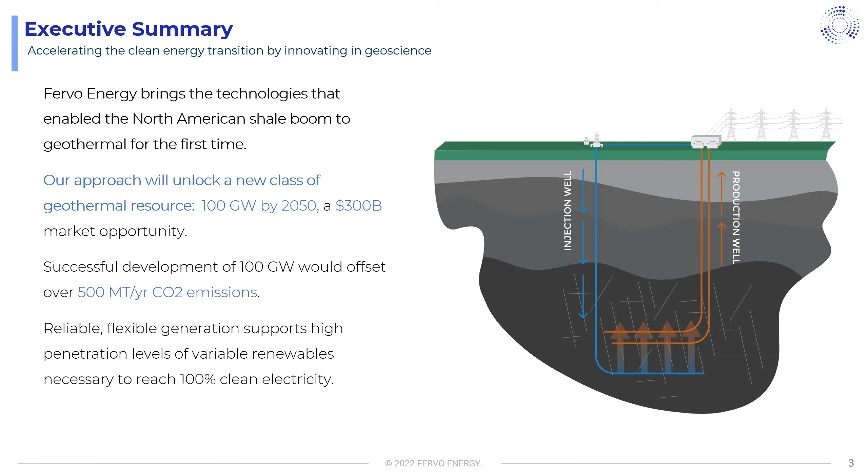There's also a huge opportunity for geothermal to play a major role in supporting the broader energy transition and fighting climate change, in the sense that it provides 24/7 reliable energy. So it works very well with other renewables. In fact, the more geothermal we can bring onto the grid, the faster we can also ramp up solar and wind and other variable renewable energy sources without some of the challenges that come along with that in terms of reliability.

So we're taking an approach to geothermal reservoir engineering and reservoir management that relies on horizontal drilling, also multi-stage zonal isolation. We're also taking advantage of some of the more modern downhole diagnostic technologies, and in particular have a major focus on what we're doing with distributed fiber optic sensing to help monitor and characterize downhole conditions in real time.

So broadly speaking, I have a couple of schematics here and we'll get into it in more detail as we go through the presentation, but we're looking at drilling horizontal wells down to depths to meet our target temperature window of about 175 to 225 C, and drilling out sequences of injection and production wellbores that we can use to effectively mine the heat out of the rock. So we take advantage of, as I said, multi-stage zonal isolation, multi-stage stimulation approach.

You can see here an example simulation result of essentially what we're talking about, which forms the basis of our reservoir engineering design, making use of what's called plug and perf stimulation treatments. This synthetic example well has been stimulated with 10 stages, 3 clusters per stage, so there's a total of 30 fractures connecting these wellbores and providing hydraulic communication. The fractures provide the heat transfer surface area, and they also provide the fluid flow pathways, injectivity and productivity that the system needs. Just wanted to present a high level overview of the type of design we're working with.

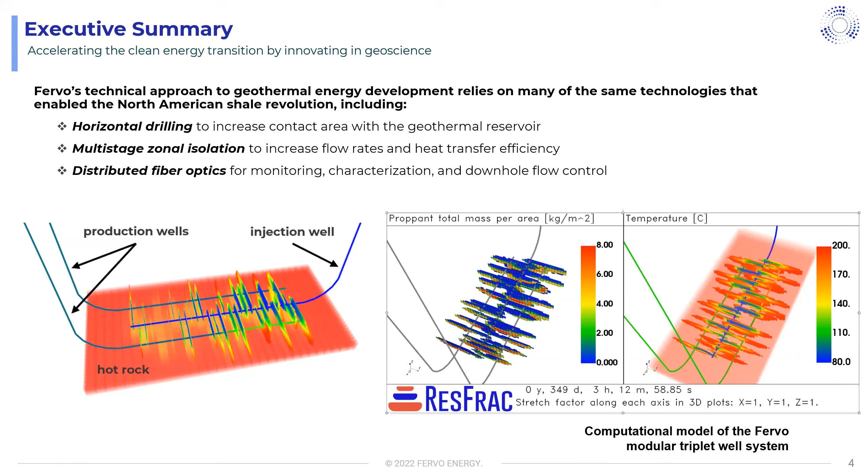If you aren't aware, the California Public Utilities Commission back in 2021 issued a new law as a result of some of the rolling blackouts that occurred in California in 2020. They did a lot of studies understanding how are we going to improve grid reliability but also meet our climate targets, and they found that geothermal is one of the only solutions that really solves both of those problems. So they actually issued a ruling that utilities in California had to procure 1,000 new megawatts of geothermal power by 2026. This is probably the most important thing that's happened to the geothermal industry in the last decade, because it's now mandated and can't be reversed. If you think about the opportunity there, 1,000 megawatts represents something like 200 to 300 new wells that need to be drilled just in the next 5 or 6 years.

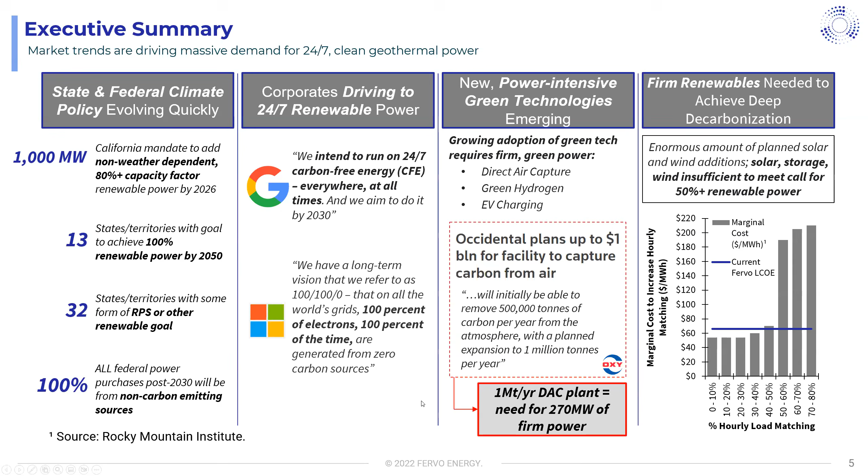So there's a lot of exciting trends in the market that are driving customers to look at geothermal in ways they haven't ever done before. And fortunately, Fervo is well poised to help capitalize on those market tailwinds.

We've actually signed over 78 megawatts of new PPAs in 2021 and 2022 so far, and there's more to come. In May last year we announced the first corporate agreement between a developer and a corporate for geothermal power. It's a 5 megawatt project with Google, and I'll touch on some of the updates to this project later in the talk. This is a project we're actively drilling and developing today in Nevada.

We've also signed 2 greenfield power purchase agreements. These are both 15-year deals with community choice aggregate utilities in California, and are both responsive to that 1,000 megawatt mandate I mentioned before. The first was with East Bay Community Energy, which is California's largest CCA. We actually just announced this morning a new power purchase agreement with Clean Power Alliance, also a 15-year deal. The EBCE deal is 40 megawatts, the CPA deal is 33 megawatts, providing power to about 32 different communities in the LA area.

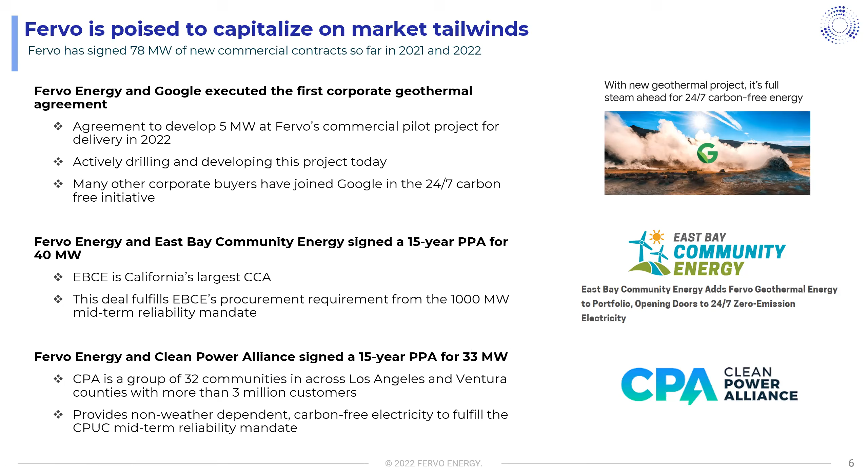And really fortunate to have great support both through federal funding, through grants, and also raising private capital with some of the leading venture investors out there.

This slide presents a little bit of our history in terms of fundraising, starting with just a $50,000 TomKat grant from the Stanford TomKat Center. We've since gone on to receive several million dollars of funding through the Geothermal Technologies Office, through ARPA-E, also through the FORGE project itself. So very grateful to have the support of the Department of Energy in supporting our technology development.

And then we've raised several rounds of venture, most recently a $138 million round led by DCVC, with really strong participation from some of our existing investors. So we feel like we've really set up a solid partnership to support us to go out and execute on these ambitious development goals.

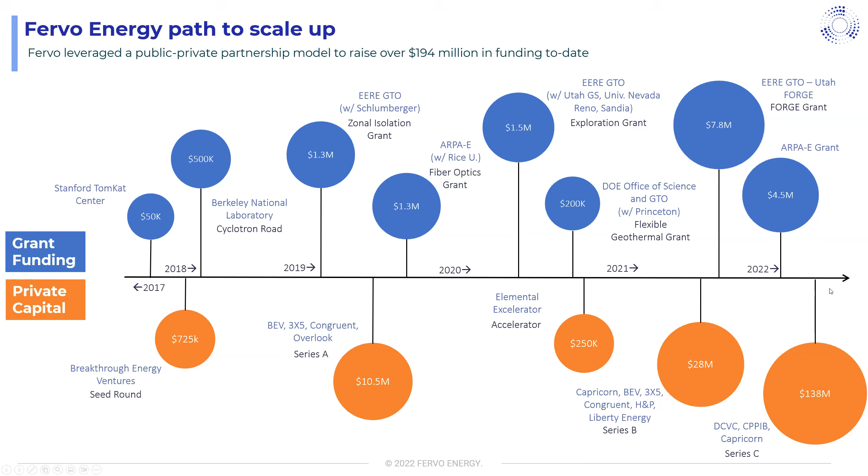So hopefully that provides a little bit of context on Fervo, some of the background and where we're at today, and some of what the future holds for the geothermal industry at large.

And I'll transition now into sharing a little bit about how I think about reservoir engineering and understanding reservoir performance, and some of the motivations for why we see horizontal drilling, multi-stage stimulation approaches being such an effective way at developing geothermal resources.

So I thought I would just start with the higher picture and just talk a little bit about the broad drivers. It's probably not intuitive for folks that haven't really dived into detailed project economics and project finance.

But when you put together a project model and you test different sensitivities on what are the biggest drivers on overall project economics, you can look at things like your drilling costs, of course, are the first thing that come to mind. Your power output per well, what are your OpEx costs, how many wells are you drilling, what price are you getting in terms of your PPA - those all jump out.

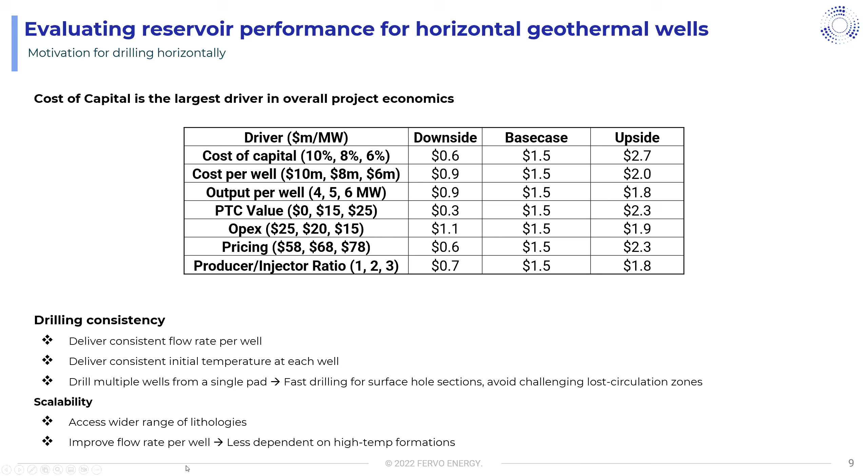I also think a big driver for drilling horizontally is scalability - accessing a wider range of lithologies. We don't really need these sweet spot hydrothermal systems anymore. And again, improving your flow rate per well. There's always 2 factors that control your output per well, and it's temperature times flow rate. So really, Fervo's approach is all about focusing on improving flow rate per well and the consistency therein.

So you started looking, there's been a lot of work done on horizontal or highly deviated geothermal wells for decades now, and there's actually a lot of work to build upon. The theory for understanding flow and heat transfer in a horizontal well system has been around since at least the 70s, when Gringarten published this paper.

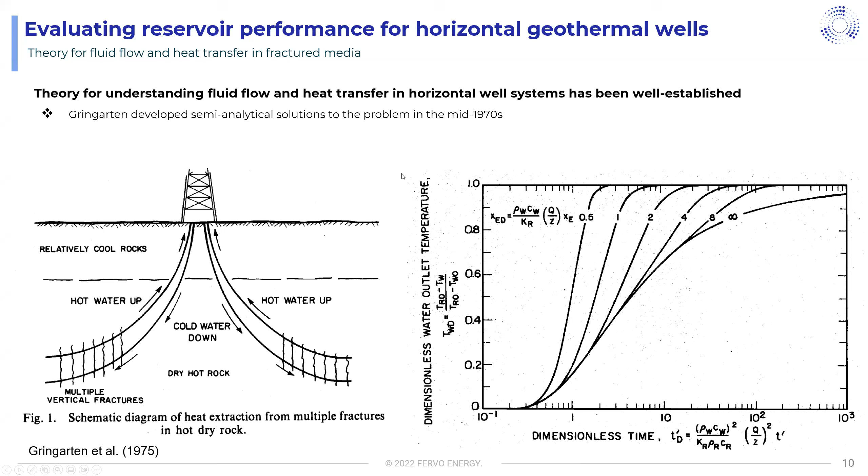He's looking at highly deviated wells connected by sets of parallel fractures. And he put a lot of work into understanding some of the major drivers and how you think about the thermal performance over the long-term production history of a given system. I'll talk a little bit about that in a moment.

But this is back in the 70s. So if you dig into this paper, they really limited their analysis to a total of 10 fractures. And if you look at what they're doing in shale now with 15,000 foot laterals and 50 or 75 stages, and each stage, they're getting more and more towards extreme limited entry designs where they have 10 or more fractures per stage - you're talking about hundreds and hundreds of fractures per well.

So when we started looking into the literature here for geothermal, very often this was the case, and even more recent studies were kind of limiting their analysis to 5 fractures or 10 fractures at most in a lot of ways. But you can see even just from this study that going from 1 fracture out to 10 fractures, depending on your fracture spacing, can have a big impact on your thermal decline and thermal performance.

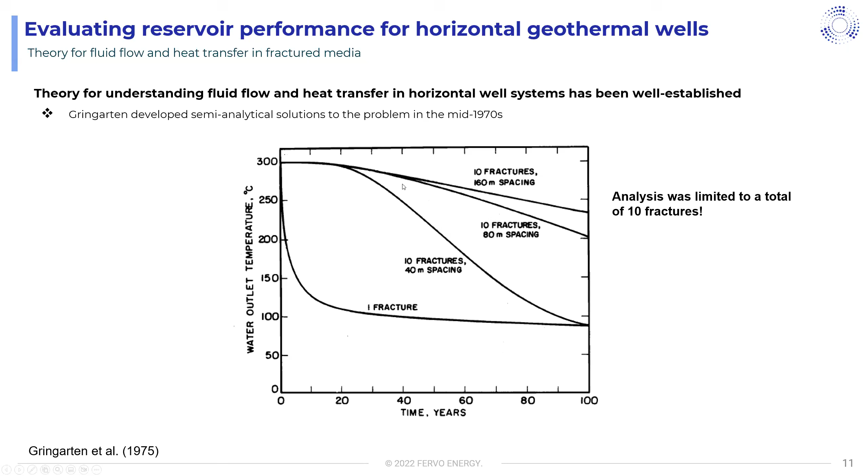I'll just take this one step further to really show some more of the motivation for this. This plot that he put together is really like a set of type curves for thermal decline. The y-axis is basically temperature decline, although it's inverted. I typically like to flip this around, but it goes from 0 thermal decline down at the bottom up to the point at which your reservoir or production fluid declines to equal your injection temperature.

It takes some amount of time for that to happen as the thermal front moves through the reservoir. And then each one of these type curves is for a different effective fracture spacing, essentially. It's interesting to look at how some of these fracture spacing curves kind of pull apart at these higher numbers.

But if you actually look in practical terms at what a reasonable amount of thermal decline is for any given power plant, you're kind of at 20% being about the most you'd want to design for. So actually there's not a ton of difference between different fracture spacing cases. And so then it's all a question of, well, how do you slow your rate of decline down one of these curves?

And so I've just pulled out this dimensionless time number that Gringarten was able to parameterize. And what you see is that he also had a slightly different way of looking at it. So I put this in terms of things that we think about more commonly now in like a horizontal well stimulation treatment design.

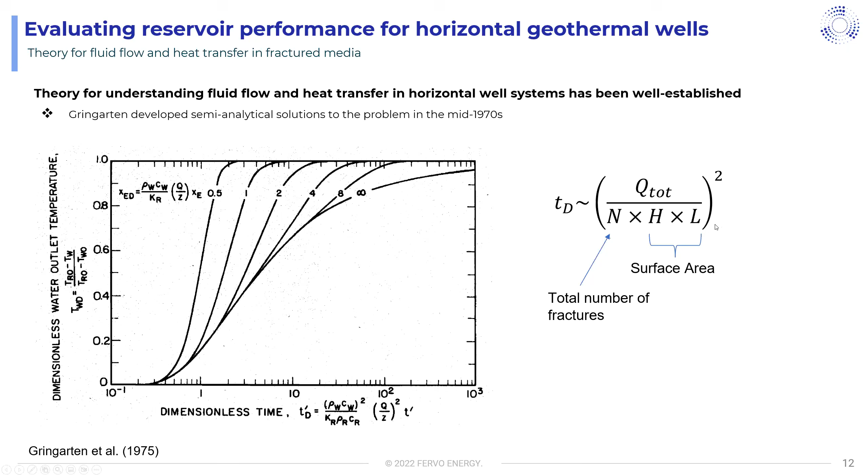So why not use some of those methods and apply them to geothermal? By the way, this is basically similar for all geothermal systems dominated by flow through fractured reservoirs. The specifics are slightly different, the shape of these type curves might be slightly different, but it's all driven by surface area. Without taking a multi-stage stimulation approach, that becomes out of your control — you're basically relying on natural fracture surface area to get you there. Whereas we have the means, the technologies and the tools to do this already today.

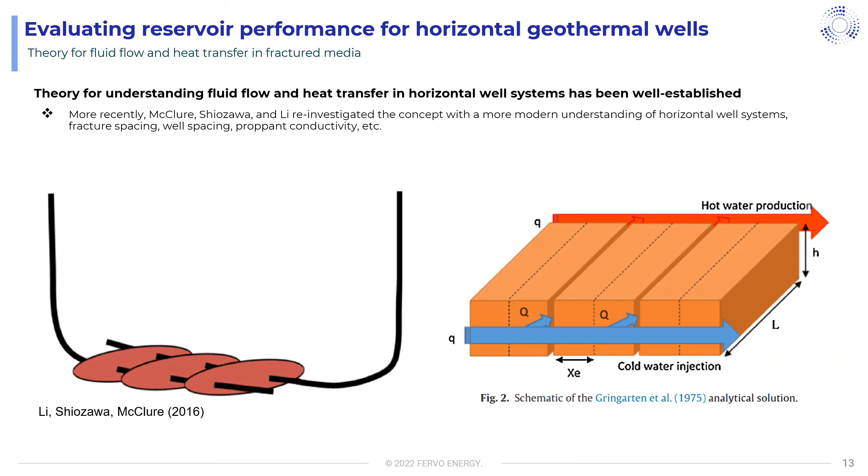So more work has been done in the meantime. McClure and some of his students, when he was at UT, modernized the Gringarten model for more of a typical horizontal well design, and they found really promising results. And of course, nowadays we have access to much more state-of-the-art full physics reservoir modeling at our disposal. This type of reservoir modeling forms the basis of everything we do at Fervo.

We're able now to use models that can model the full life of the field, both the drilling phase, the stimulation phase, and the long-term circulation phase, modeled in a single coherent simulation, with all of the right physics that are central to understanding the problem — so obviously fluid flow and heat transfer and fracture mechanics, but also a detailed understanding of how multi-stage, multi-cluster completions work, offset well interactions, fracture initiation and propagation.

We can put in all of the latest and greatest in terms of fluid additives and fracturing fluid systems, so non-Newtonian fluid systems and proppant slurries, and understand how that impacts proppant placement. And then even some of the near wellbore processes that are really key to understanding injectivity and productivity of geothermal wells — limited entry, perforation, pressure drop, fracture tortuosity, screen outs — all of these things are now embedded in one consistent simulator.

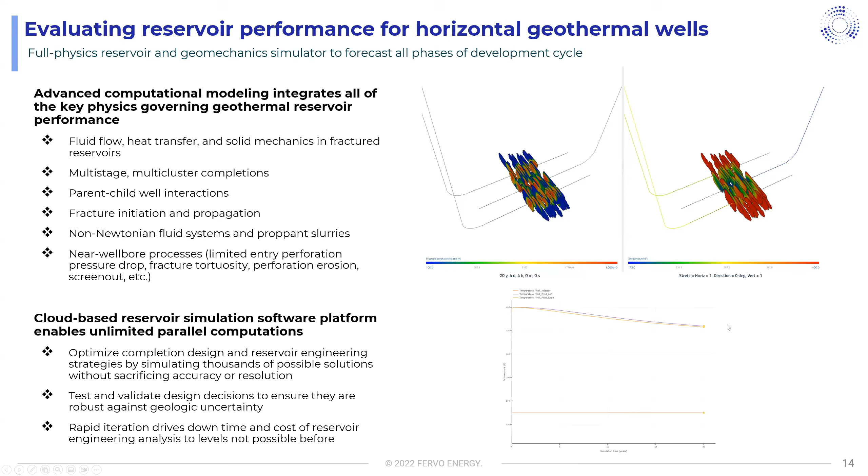We can model systems like this and then model out the thermal decline profiles over time. I'll give a couple of examples of a synthetic sensitivity study, just to give you a sense of how performance looks in some of these horizontal well systems. I'm looking at just a doublet well system here, showing the discretization — I'm showing just 1 out of every 10 fractures, so there's actually hundreds of fractures we're simulating along this reservoir.

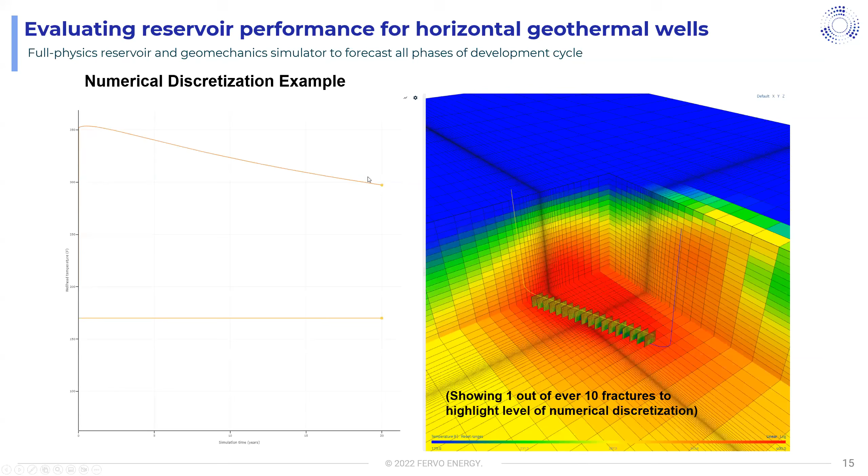One of the main outputs is looking at the thermal decline profile over time, and then you can start running sensitivity analyses on this. I'll give 2 examples. The first one: we're looking at a doublet system aimed to target about 5 megawatts of gross power, with different lateral lengths of 2,000 feet, 3,500 feet, and 5,000 feet. This is still on the lower range of what's possible in shale, but we've actually done this now, so it's possible in geothermal to drill wells at least of this length.

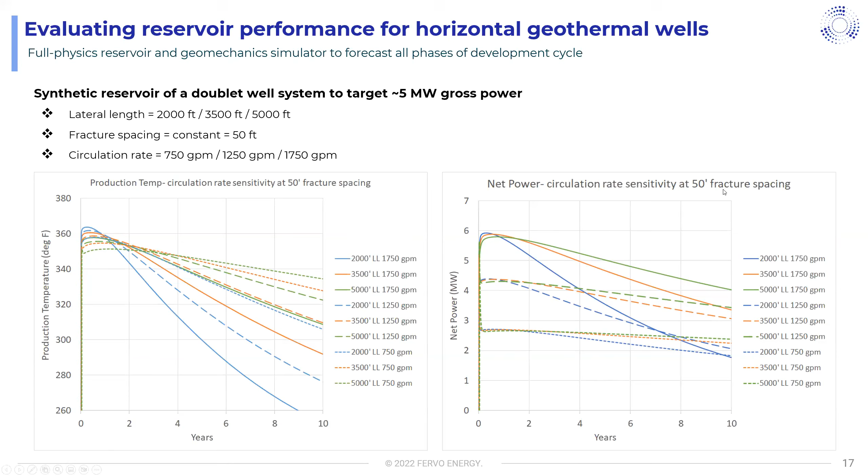I'll just touch on this really quick because I get asked a lot of questions about thermal short circuiting, fast flow pathways. A lot of the early studies that looked at this found that it was very significant. They really looked at a small number of flowing pathways, like 5 or 10 total fractures, and said, well, what if one was really, really high perm? So we started looking into this.

I specified the same system, but now instead of uniform fracture conductivity, looking at a log normal distribution of conductivity. Most fractures are really low conductivity, but a few fractures are really extremely high. So what does that look like?

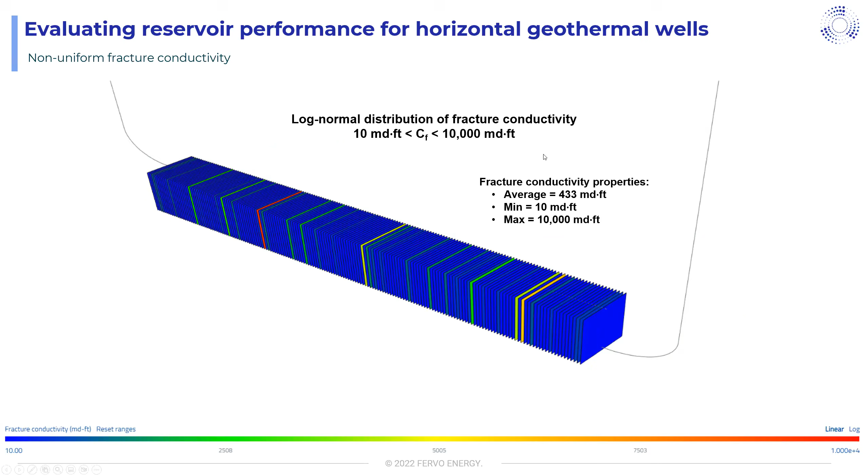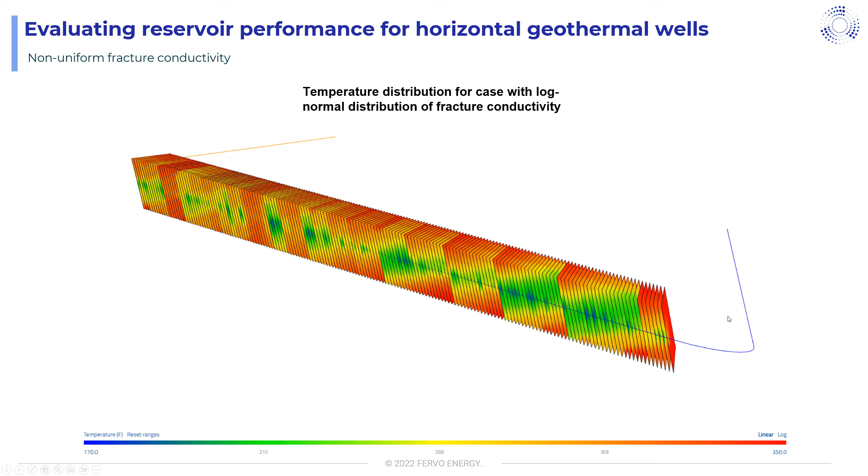And absolutely, you get some—this is an odd angle showing from the bottom up, but it shows kind of where the formation's cooling down more quickly because it's taking more flow. It certainly happens, it's a real phenomenon. But when you actually compare the overall thermal performance, at least in this case, it didn't have a significant impact. Over 20 years it impacted things maybe 10 degrees or so.

So that's not to say this is a universal law. I think this is still a big issue that needs to be solved, and there needs to be a lot of R&D that goes into it. But I'll say, the larger number of fracture flow pathways has some ability to basically average that out.

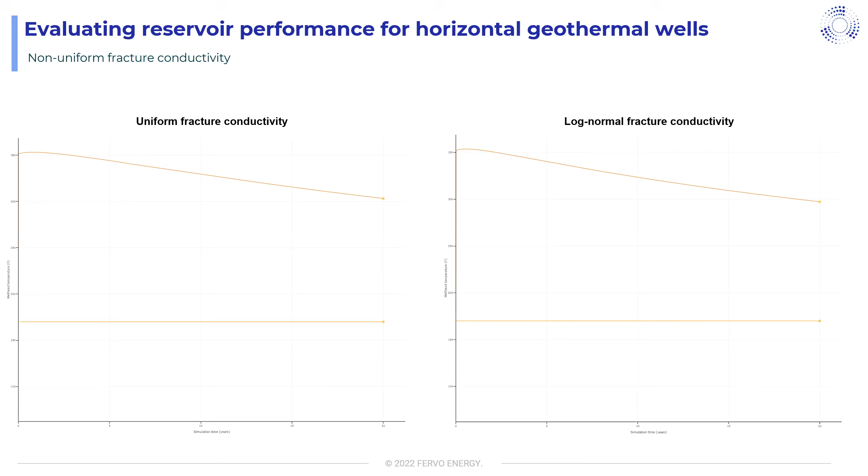So I'll transition now and just share a couple of updates on some of the field scale demonstration projects that we are operating. I'll give an example of a site out in Nevada.

We began operating at this site in 2020. And our first major field project there was to do a full scale plug and perf multi-stage stimulation treatment. So we identified this site, partnered with an existing operator that's operating a commercial power facility there. It's currently underperforming, and so there's headroom for additional production.

And so we went in there and recompleted an existing well. It was an open hole slotted liner completion, so we recompleted it with 4.5-inch casing, and we cemented permanent fiber optics behind casing in that well and performed just a 4-stage stimulation treatment—not as many stages as you would expect to see in a full commercial project.

And this project was never meant to be commercial, but it was really designed to target technical validation and de-risking, also collect site-specific data on some of what we felt at the time were still outstanding challenges and things that just hadn't been done in the geothermal industry before, like a multi-cluster stage with proppant.

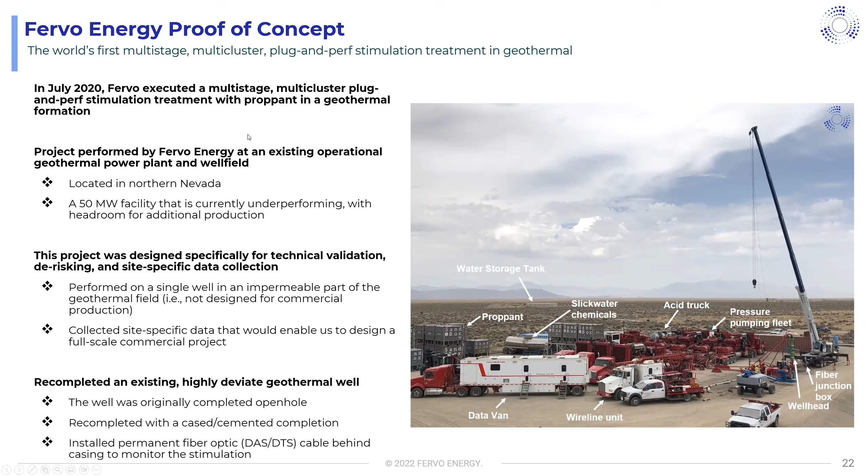I'll just touch on some of the data here briefly. We were able to place industry standard proppant loading concentrations. We were able to show that the treating pressures were within our expected ranges, and didn't depend too much on lithology. We tested a range of lithologies, both metamorphic sediments and also more igneous intrusives, and found that the treating pressures and treating conditions were broadly similar across all different lithologies we tested.

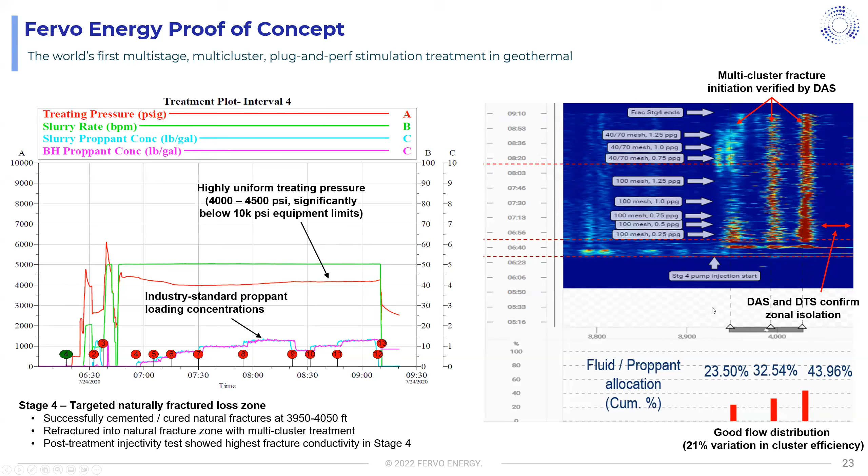Using the fiber, we were able to confirm that we did get breakdown at every perf cluster, and got good evidence of initiation at all clusters, irrespective of lithology. We were also able to show that during the treatment, there was relatively good flow distribution as measured by the distributed acoustic sensing fiber.

Moving on, after successfully completing that project and collecting a lot of site-specific data, we built a plan to continue working at that same field and develop a 5 megawatt project. We really kicked off the drilling campaign for this project earlier in 2022 in January, and it's been hugely successful so far.

This was the well where we did the testing, what we call the proof of concept well. Following that, we drilled a 3-well drilling campaign that included a vertical monitoring well down to a little over 8,000 feet. Then we drilled a horizontal well that's going to be used as the injection well for this doublet pair. And just more recently in September, we drilled and successfully cemented in place fiber optic cable along this horizontal production well.

This took a lot of hard work from the Fervo team, along with a number of other partners, and has been thus far very successful. In terms of drilling these types of highly deviated horizontal wells in geothermal rocks, we achieved a number of firsts.

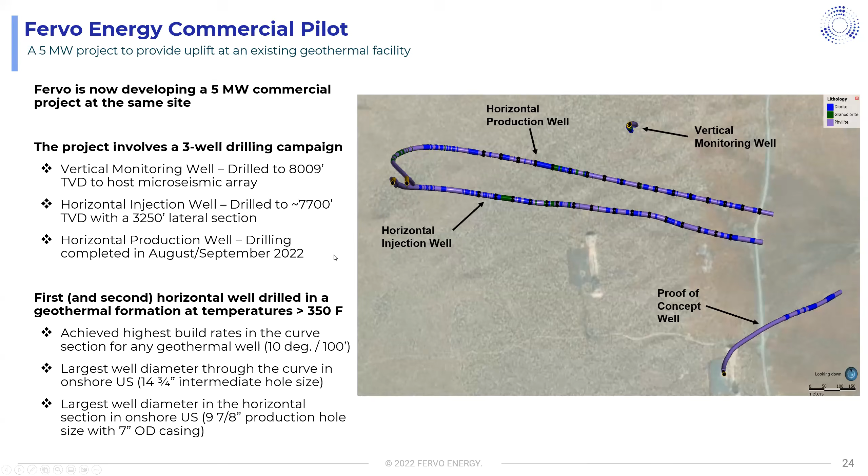This is also proving very well that we can drill more complex well paths and drill multiple wells from the same pad, even in these harder metasedimentary and igneous rocks, and at higher temperatures. Here's just another example of what that system looks like in cross-section view.

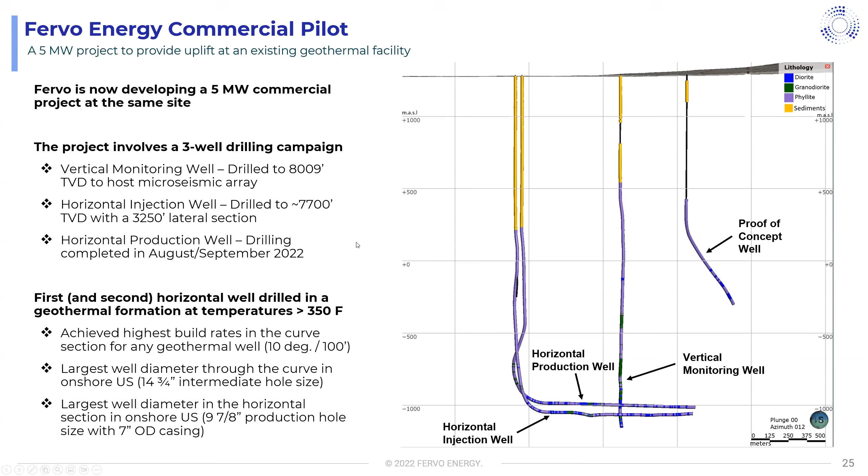In July, we were able to complete a 16-stage hydraulic stimulation treatment in the injection well. This is now the largest multi-stage stimulation treatment in a geothermal formation. It's 16 stages, 6 clusters per stage, with a few more aggressive limited entry stages at 9 clusters per stage. So there are over 100 discrete flowing pathways that we've created along this well at this point.

All 16 stages were pumped successfully, close to as designed. We pumped about a little over 11 million gallons of slick water and 7.5 million pounds of proppant during this job, with a really strong focus on data acquisition.

We had in-well fiber to look at temperature and DAS flow distributions. We had microseismic low frequency DAS in the offset well to measure strain signals. And we also had a very comprehensive induced seismicity monitoring program, including a local network and a traffic light system in place that we followed throughout this job.

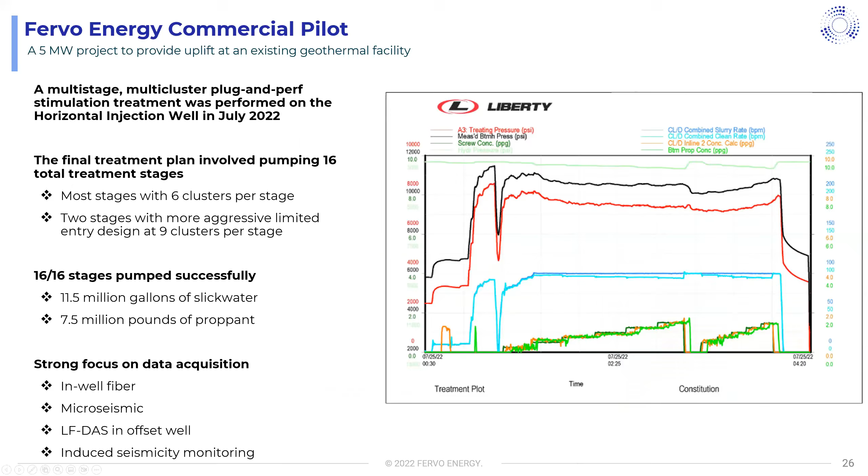So, very excited to share some of that progress on our field projects. There's more work to be done here, and we're excited to continue working on this project over the next several months.

I'm going to follow on that and share one interesting example that came out of these field trials. I think it has some really interesting lessons for the industry at large in terms of how we think about innovation in the geothermal industry. So what I'm going to be focusing on here is the performance of one of the key tools that's part of a multi-stage plug and perf stimulation treatment design, which is the zonal isolation plug, or the stimulation plug.

You run one of these. How the process typically works, for those who aren't aware: during each stage, you first run this plug on a single wireline system, and you set it. Then on the same wireline, you go upstream of the plug and perforate - that's hence the name plug and perf. This reopens the formation, reopens the wellbore to the formation, and establishes hydraulic communication through the perforations. Then when you're getting ready to pump your next stage, you drop a ball that flows down the well, seats somewhere close to the seating element, and provides hydraulic isolation from everything downstream of the plug. So all your fluid is forced into those perforations that are upstream.

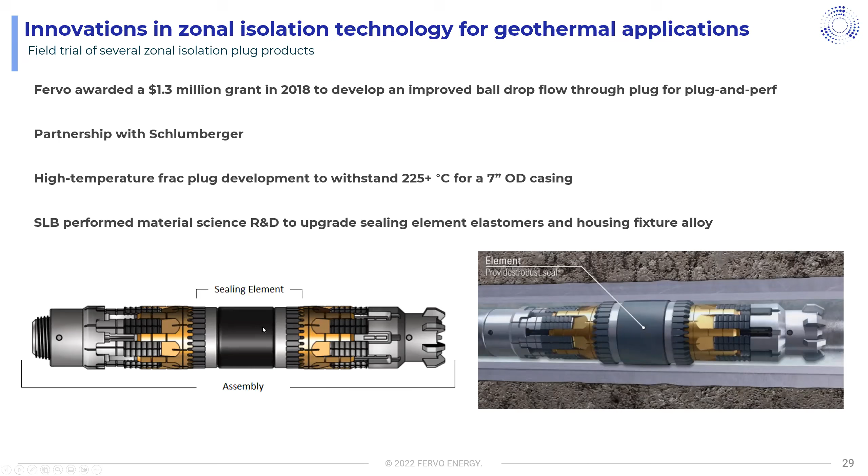So this is just a picture of what this copperhead plug assembly looks like. It's got kind of an aluminum housing fixture and a sealing element that expands when you set the plug. We did a lot of work with Schlumberger - it took about 2 years to do R&D, testing, modeling, fabrication, and more lab testing to verify that this plug would meet the standards we set out to achieve.

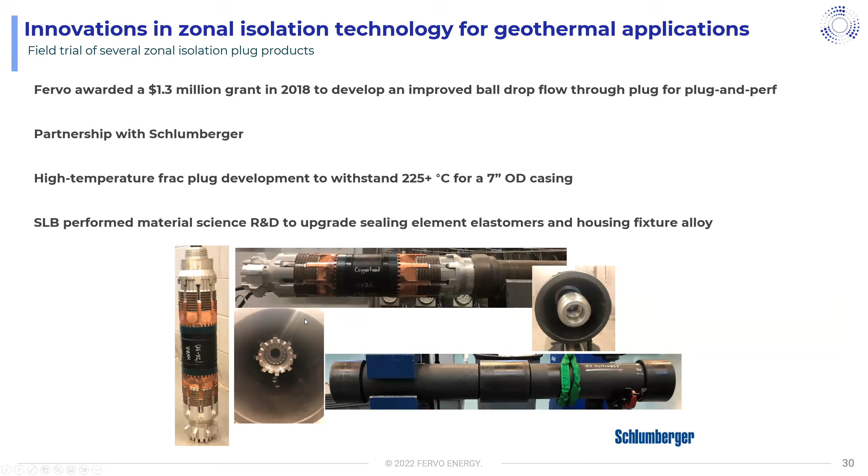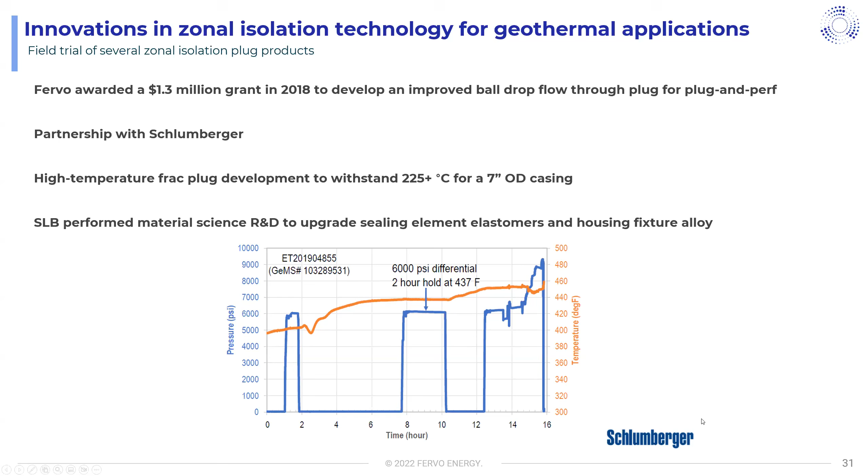Here you can see an example of one of the test plugs they developed with a new elastomer material. Ultimately, we were able to find an elastomer material that would meet our standards of 225 C, or 437 Fahrenheit, that would hold up for several hours - which a plug must be able to last for downhole. So a very successful program overall, because this is a product that didn't exist previously and is now commercially available to the industry. So if you find that you need these type of high temperature plugs, you can reach out and I can share more details, but this exists now.

So moving on, we're thinking, okay, let's think about this for our project. The horizontal wells I showed you previously were completed in reservoir temperatures of about 370 Fahrenheit. So we said, okay, for sure that copperhead high temp plug we just developed is going to meet that standard. But let's look out there across the market and see what else exists. We found a composite plug line where they did have 7-inch ball drop flow-through plugs - they had one even up to 375, but primarily their plugs maxed out at 300 degrees Fahrenheit. Then we looked also at Schlumberger's standard copperhead - we found they did have a 7-inch line up to 35 thousand pounds, good to 350. So both of those are below our formation temperature.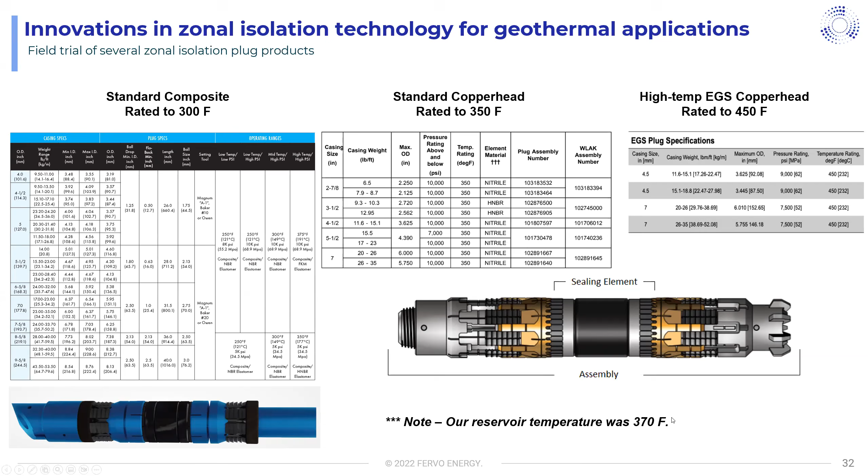But let's think one step further about the conditions this plug is actually going to get exposed to. We did a lot of modeling looking into this, and realized that while you're pumping extremely high flow rates - 100 barrels a minute, 4,000 gallons a minute - for many hours into a given stage, you're cooling down the wellbore quite a bit. So we performed simulations looking into this: background formation temperature was 400 degrees, treating rate was 100 barrels a minute.

We pumped for 2 hours with 85-degree Fahrenheit fluid, kind of modeling what a worst case scenario might be, where maybe you pump 2 stages successfully, but then while you're setting up for stage 3, you have some equipment malfunction or some operational challenge that requires you to allow the wellbore to warm back for 12 hours before you start pumping the next stage.

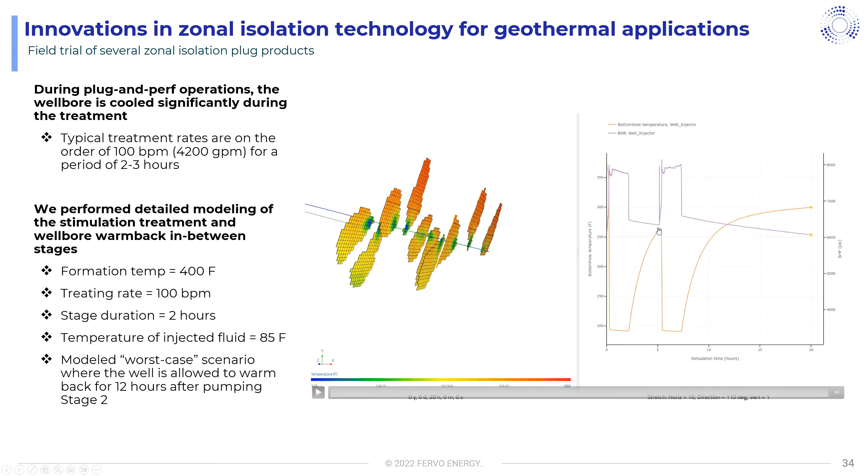So we used modeling to look into this. Here's an example of treating pressure, this top curve, just meant to show you when we're actively pumping. And this curve down here is the actual wellbore temperature at the location of that next 3rd stage plug. You can see while we're pumping, the well very quickly cools down to lower than 100 degrees. Then there is some warm back that happens fairly quickly, but it really only goes back up to 250 or so.

I have a slightly more zoomed in view, but in the 3-hour shut-in phase, the temperature rebounded to 265. Then in the next stage, it dropped again to 100. And then after a 12-hour shut-in period, the wellbore only warmed back to 300 degrees.

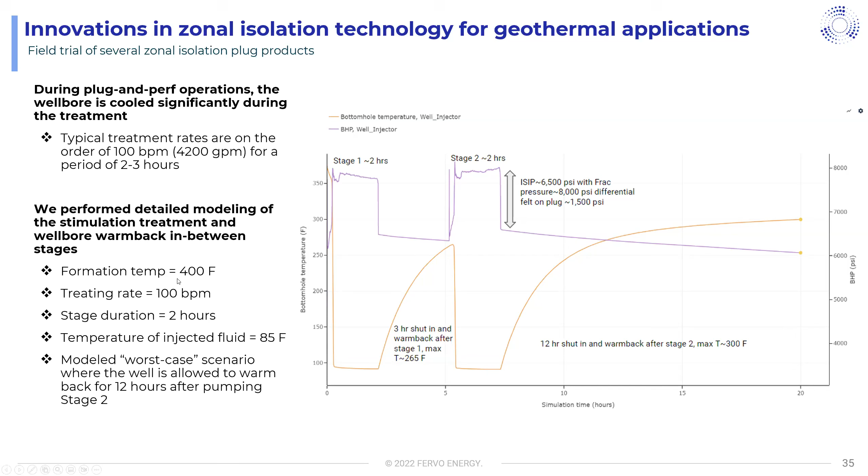After doing a lot of modeling like this, we started saying, well, we can most likely get away with plugs that are rated to significantly lower temperatures, and quite frankly, are just cheaper and easier to mill out. So there's a lot of advantages for using these existing plugs.

So let's get into the actual data and what we observed during this treatment. We ended up trialing 3 different plugs. We did 11 standard composite plugs, 4 standard Copperhead, and then 1 of this EGS Copperhead. We placed that in the final stage since it had never actually been run downhole before. We wanted to minimize our risk there.

Now we had permanent distributed temperature sensing fiber optic cable behind casing to monitor temperature continuously throughout the entire lateral, throughout the entire job. So we asked, okay, what was the actual temperature at our plug 16 location where this EGS plug was going to be sitting? Remember, the initial reservoir temperature was measured at 370 F.

So what I'm showing here on the top curve are just the treating plots for stages 15 and the pump down between stages, and then the treating plot for stage 16 on the right. And this curve is showing the actual temperature measured in real time at the location where the next plug was going to be set for stage 16.

You can see that during pumping of stage 15, it quickly dropped to like 115 and then kept dropping down to below 100 degrees, very consistent with our modeling. And then after we shut in, for sure we saw some warm back, but it was limited, we saw at that stage about 200 degrees.

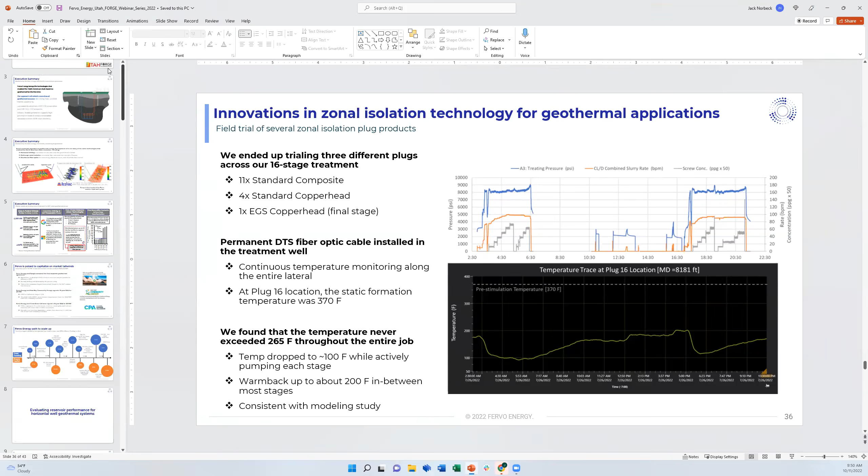Well, thank you, Jack. I think we all need to congratulate you and your team for a fantastic stimulation program and for the vision to take this forward.

I know we do have a lot of questions, so let's move through those one at a time. Herman Libet is asking: the performance of unconventionally drilled and completed fracking wells is limited. Any comments on the economics of such wells, and any comments on his statement in general?

I don't know exactly what you're getting at, but if you look at a common metric, new rig oil per month, you see that going up over the last 10 years. So people are getting more efficient in terms of getting more initial production from wells, whether through longer laterals or larger stimulation jobs. You've for sure seen production improving, but it's definitely challenging and basin specific. So I can't really comment too much more on that question.